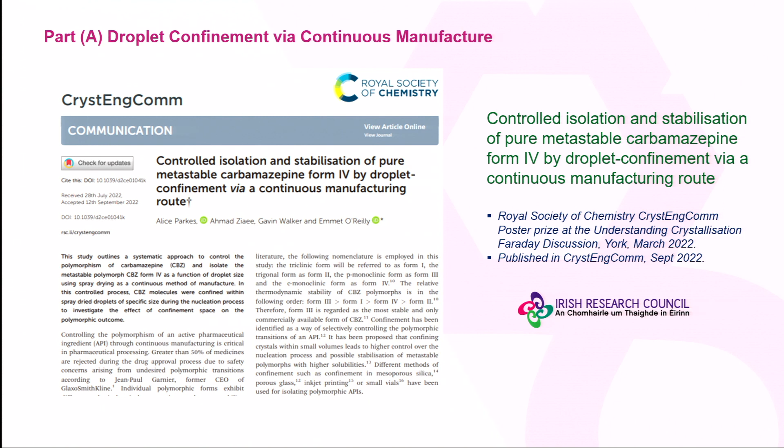So before I begin, let's just have a quick recap of what spray drying actually is. If you have taken a protein shake, okay, you've taken a spray dried product, same with baby formula. Essentially what we have is a liquid feedstock, which flows into an atomizer, and as part of that we flow in hot nitrogen or an atomizing gas. This converts your liquid into an actual solid. This process happens incredibly quickly, and we actually collect the product down below the cyclone.

What we do in my group is we change the ratio of the atomizing gas to feedstock, and as a result we can alter the droplet size. So we have two examples here: we have the larger droplet up the top and the smaller droplet down the bottom. So what this does is physically reduces the size that an API has to crystallize within, and as a result we see substantially different polymorphism.

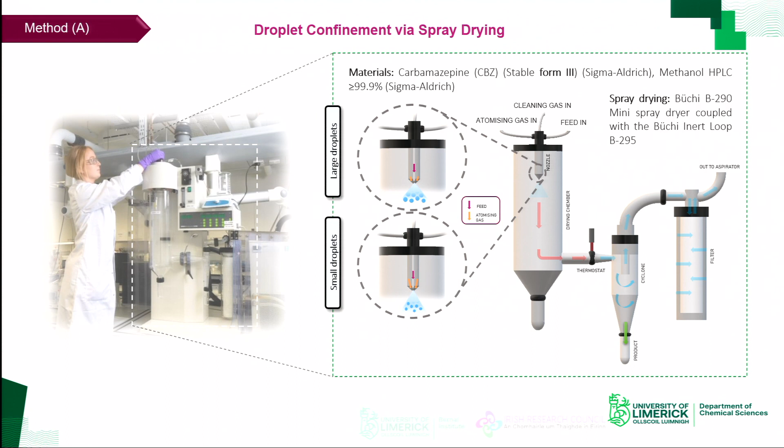So this particular study we performed using carbamazepine, which is an anticonvulsant medication, and it's typically administered in form 3. So form 3 is the actual commercial form, however form 4 is the metastable form, and this does show enhanced dissolution properties in the metastable form 4 relative to form 3.

So when we look at the table here, let me talk through some of the main results we've seen. If we run from sample S1 to S4, four individual samples, we can see here that when we change the actual atomizing gas flow rate, we get a subsequent change in terms of the droplet size and also the particle size. We can confirm this using particle size distribution, as you see on the right. With respect to the best graphical representation of what's happening here, that's down in the bottom left. As our droplet size changes, so does our final particle size, and we can see the corresponding SEM to look at the surface morphology.

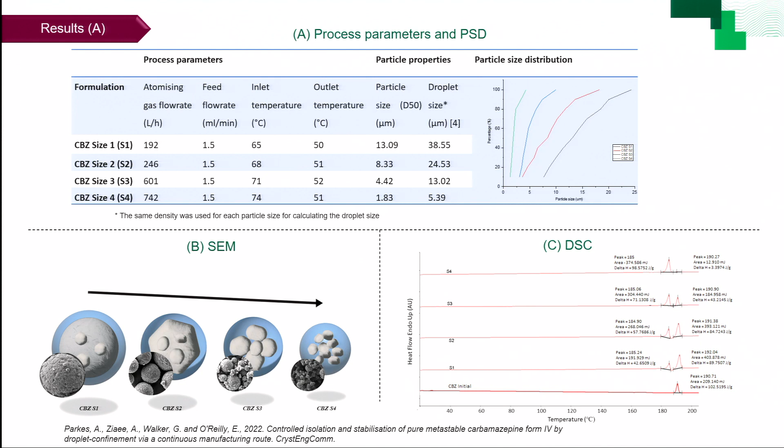Now, this ordinarily isn't that exciting. You would expect some change in terms of final property parameters with respect to altering spray drying conditions. But where it gets interesting is when we actually look at the DSC results. What we can see here is our melting peak for form 3, which is approximately 190 degrees C. With samples S1, S2, and S3, we see a combination of form 3 and form 4. Remember, form 4 is our metastable form - this is what we want to ideally produce.

However, we see a combination of both form 3 and form 4 for the S1, S2, and S3 samples. What we observe is that over a very short period of time, any of that form 4 that has formed transitions into form 3.

Now, what's really unique is if we look at the smallest droplet size, we can see that we actually have 100% form 4. We initially were quite excited by these results.

We put it on stability testing and took a look to see how the actual polymorphic form changes over time. We've confirmed that with PXRD, and we can see that it remains stable after 3 months. Well, it was 3 months when I compiled this slide originally - it's actually 6 months now.

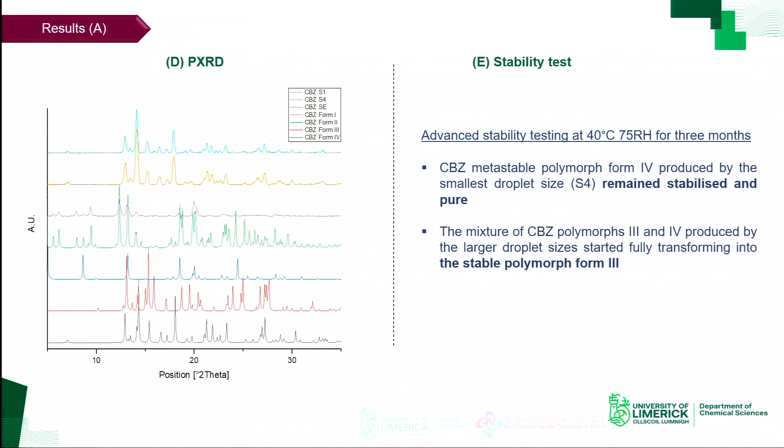So we've demonstrated a way to actually produce that metastable carbamazepine in form 4, which again has enhanced dissolution properties and potentially improved patient benefits as well.

So what does this mean? Well, there are a few benefits. From the scientific technical perspective, it allows us to, for the first time, actually produce carbamazepine in form 4. And it introduces the approach of targeting specific metastable APIs, giving us a certain degree of control over the nucleation direction in a continuous manufacturing framework.

But with respect to the community here today, the real potential of this work is in producing metastable crystal forms for current APIs that exist. We've demonstrated a method in which we can do this using size control, and we're rolling that out to different types of APIs at the moment.

Another potential benefit - we're probably all aware of this patent IP cliff. For example, if we can manufacture the same API but in a metastable form as opposed to its conventional form, that's potentially new IP as well. So it's a way of prolonging the IP for existing APIs.

So part B, leading on from this, we then chose to look at repeating the study, but rather than using a droplet size for the confinement, we actually went and used a porous structure - porous silica in this case.

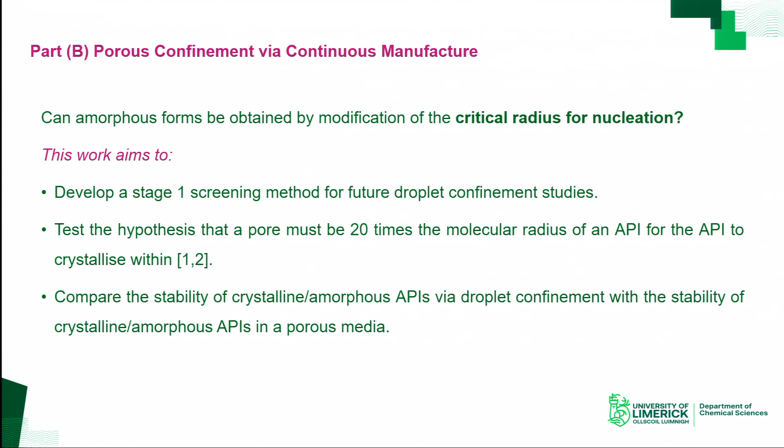Part of the reason behind doing this was, first of all, to develop a stage 1 screening method for future droplet confinement studies. When we are processing this using spray drying, we do have a certain amount of control over the actual droplet size. However, we can get more precise control if we use a porous substrate.

We also wanted to test the hypothesis that a pore size must be 20 times the molecular radius of an API for the API to actually crystallize within it.

To give you an overview of where this work stands - and this is very much ongoing - we have 4 different particles with different pore sizes. We have carbamazepine here on the left. These vary from 60 angstroms to about 500 angstroms in terms of pore size, and the actual carbamazepine size is about 8.8 angstroms, so it should definitely fit within each of these pore sizes.

We then made up a series of different loading ratios - the ratio of carbamazepine to the actual silica. And then we crystallized each of these products using 3 different techniques: slow evaporation, rotary evaporation, and also our continuous technique, spray drying.

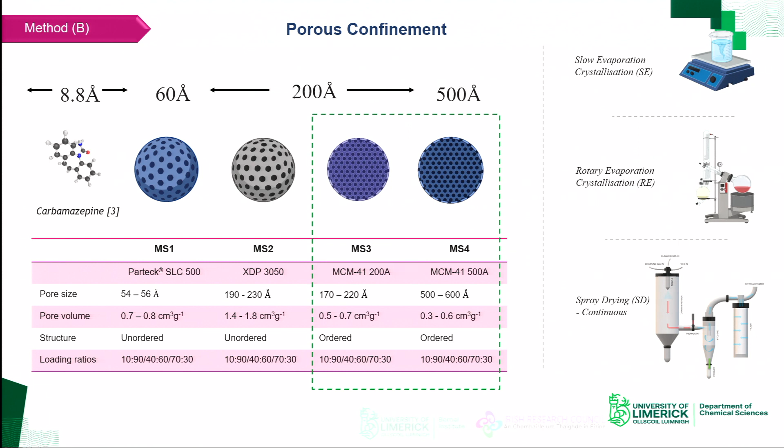Now, there's a lot of results here - I'm not going to show them all today. I'm really just going to focus on a synopsis of the results for the last 2 pore sizes that we looked at, namely the 200 angstrom and the 500.

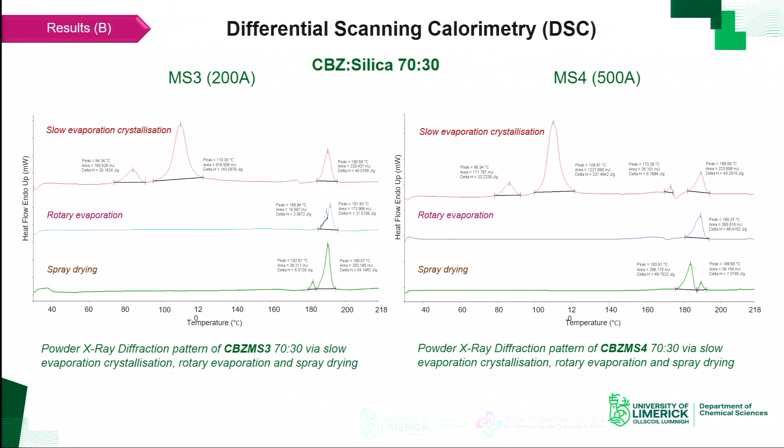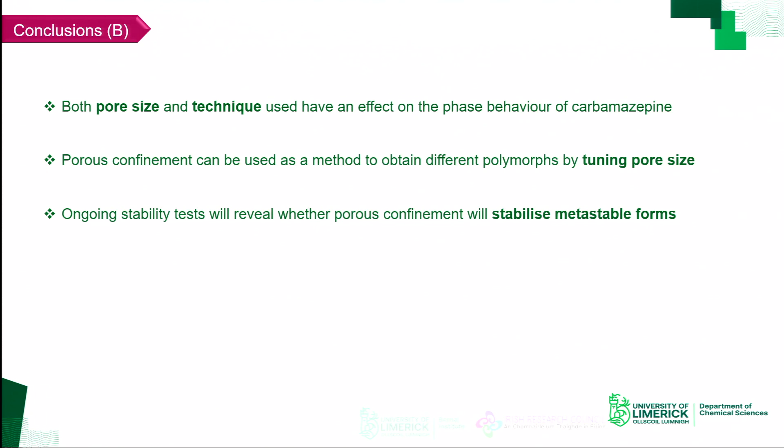So what does this mean? Well, in terms of pore size and technique, we can see that both have an effect on the actual phase behavior of carbamazepine. Porous confinement can be used as a method to obtain different types of polymorphs by tuning pore sizes. Ongoing stability tests will tell us over the next few months how stable or metastable these polymorphs actually are, and using these techniques we're now looking at a range of different APIs.

That concludes the small molecule part of this presentation. I'm going to move on now and speak a little bit about the large molecule side of things. Within large molecule, we see it's a rapidly expanding industry, and continuous manufacturing obviously is coming into that, and one of the main techniques for both drying and manufacturing biologics is spray drying.

Among the benefits, we see shorter production times, relatively larger shelf lives for the biological product relative to some freeze drying techniques, but more importantly, spray drying offers us the potential to engineer the particle. So why would you want to do this? Well, if we think about pulmonary delivery as a method of drug delivery, it's one of the more efficient methods compared to oral, transdermal, or intravenous.

So in order to manufacture a drug with the specific properties for pulmonary inhalation, such as a dry powder inhalation, there's a certain set of criteria required. For example, it needs to be below 4 microns in size, and it needs to have a specific surface morphology. Spray drying is a technique that can actually achieve that.

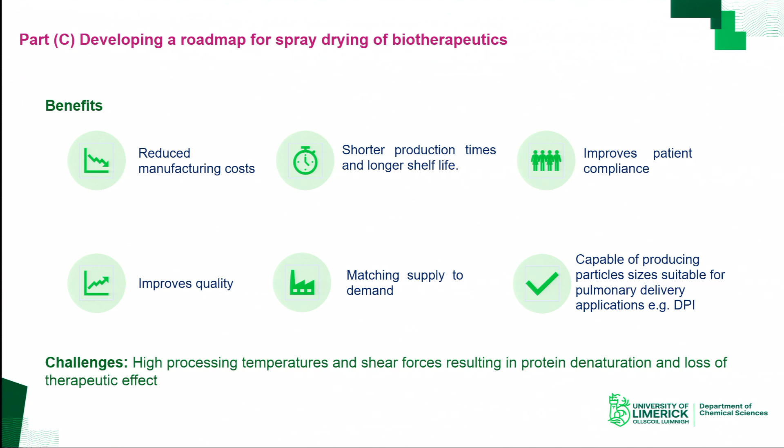Now, why isn't everybody actually spray drying biopharmaceuticals at the moment? Well, if we think about the process itself, it's a very energy intensive process. It involves high heat, and the biologic that you dry, or any material that you dry, is subject to a high degree of shear stress. As a result, we often get protein denaturation. So you could spray dry a biologic and have the desired final properties, however it's after losing any of its biological activity, so as a therapeutic it's effectively useless.

So what we do is look for strategies for addressing that. We initially set off in terms of our aims, and we've kind of expanded on this since. We set out to develop a roadmap for spray drying stable dry powder biotherapeutics with retained biological activity. Retaining the biological activity is key here, along with identification of critical processing parameters with respect to particle engineering for pulmonary delivery.

Ideally we want to be able to produce these particles with the right size for dry powder inhalation, but also have a very high level of activity retained. We initially chose lysozyme as a model biologic. There's a lot of runs with respect to spray drying to optimize this process, so we needed something relatively robust and relatively low cost, and we chose lysozyme in that case.

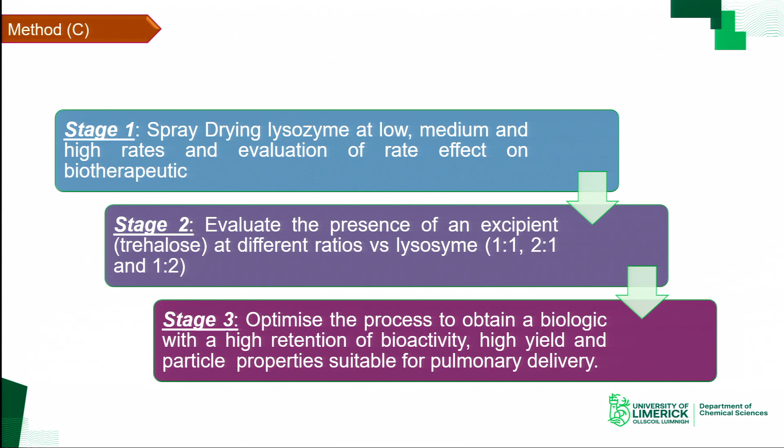Stage 1 involved spray drying lysozyme at low, medium, and high rates to evaluate the effect of both the temperature and the shear stress on the activity of the biologic. Stage 2 involved introducing an actual excipient, in this case trehalose at different ratios, to see if this actually protects the biologic during the drying process itself. Stage 3 then looked at optimizing the process to obtain a biologic with a high retention of bioactivity, high yield, and high particle properties suitable for pulmonary delivery.

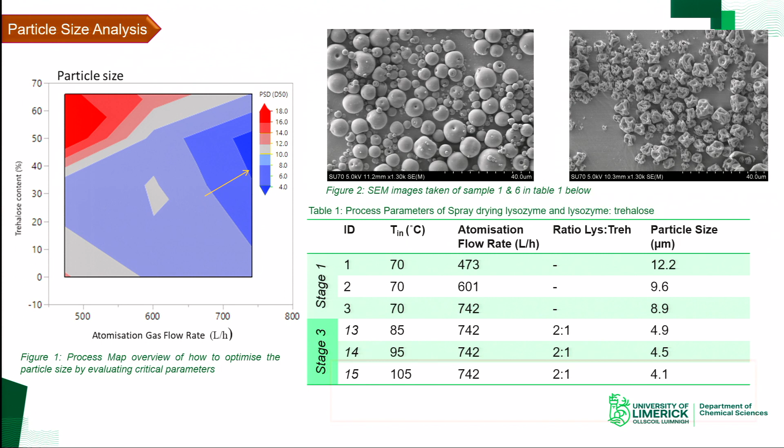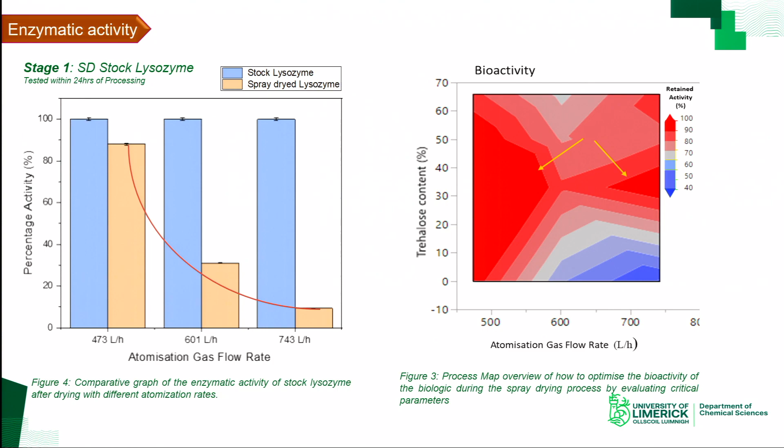However, if we plot the bioactivity versus trehalose content versus atomization flow rate, we can see there's potentially a sweet spot on the right-hand side. So if we process within these conditions, at 742 litres per hour with trehalose content of 40%, we can produce the biologic with the defined size for dry powder inhalation, and also something that retains the activity.

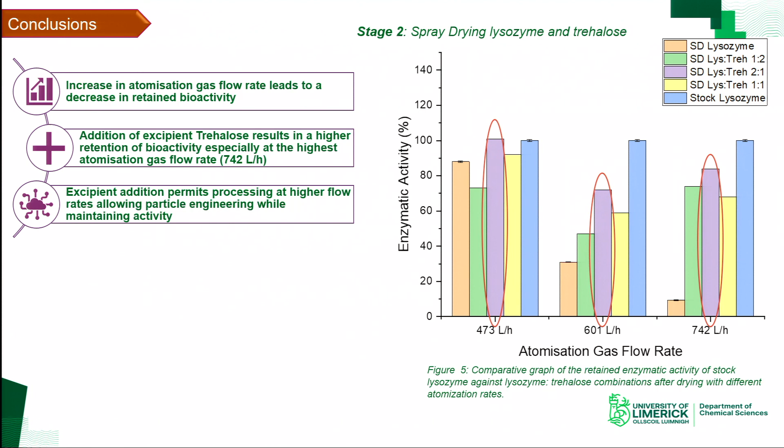So where does that leave us in terms of our conclusions? The addition of the excipient trehalose results in a higher retention of bioactivity, especially at the highest atomization gas flow rate. We've then gone on to further optimize this.

By processing at the conditions predicted by overlaying the process maps, we can achieve these particular parameters: particles with a high level of activity, greater than 90%, size of about 4.1 microns, a relatively respectable yield of 54%, and residual moisture content of 3.72.

So where we stand with this work is we are currently investigating a variety of different small molecule APIs, based on the process I showed you in part A and B of the presentation. We're also looking at investigating these APIs specifically to target stable, metastable forms.

On the large molecule API side, we're expanding away from lysozyme. We're now working with some large molecule proteins, and we're developing individual process maps for this.

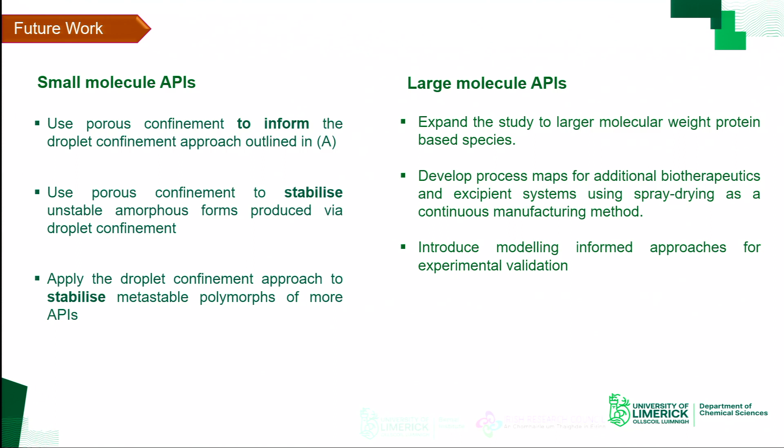So where this feeds into the community that's here today, we're very keen to work with you on this. For example, if you have a small molecule product that's a drug on the market at the moment, but you know there's a metastable form that potentially can benefit you in terms of future IP or improved therapeutic outcomes, by all means come speak to us. We can run your samples on the processes we've developed.

Same thing for large molecule. If that's a space you work in, we can actually go and apply our process maps to your excipient and large molecule protein concentration and identify what works best for that.

I suppose from listening to me here, you'd be forgiven for thinking I've done all this myself. I haven't. I'm very fortunate to have 3 excellent PhD students, namely Alice, Laura, and Emily. And I should also thank Dr. Ahmed Zai. A lot of this work is based on the work in his thesis, which he submitted back in 2020.

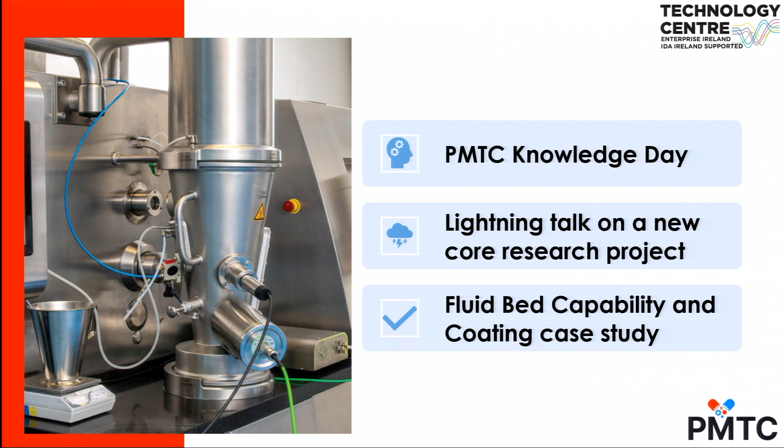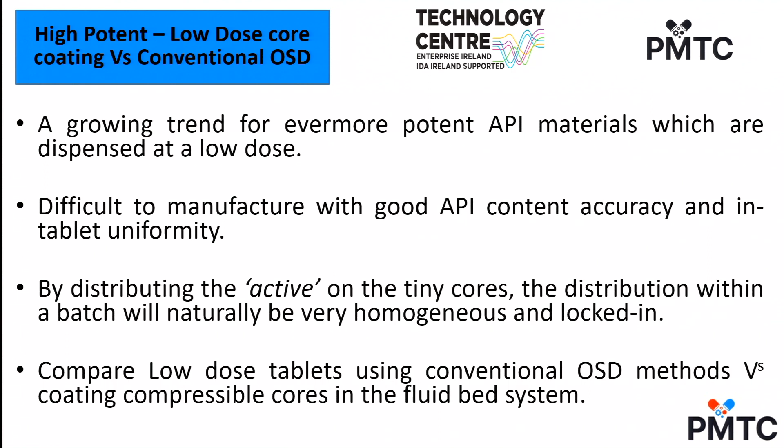That we're going to undertake on this new equipment. So, within the pharmaceutical industry, there's a growing trend for more and more potent API materials, and because of their potency, these are dispensed at a low dose. So using conventional and traditional OSD manufacturing methods, it's not easy to produce good API content uniformity in a tablet.

What we are planning on doing is to use a fluidized bed system to coat an API or an API surrogate material onto cores, and then use these in the remaining OSD manufacturing methods. By distributing the active material or the surrogate material on these tiny cores, you get essentially little granules with a little amount of the API on the surface. So when you combine all these together, you inherently get locked-in API distribution.

As long as your weight variability is low, you will get good tablet-to-tablet variability, and also good within-tablet homogeneity as well. So with this project, we're planning on looking at two streams, a conventional manufactured stream and a sprayed granule stream, and then producing tablets and looking at the homogeneity of API between the two.

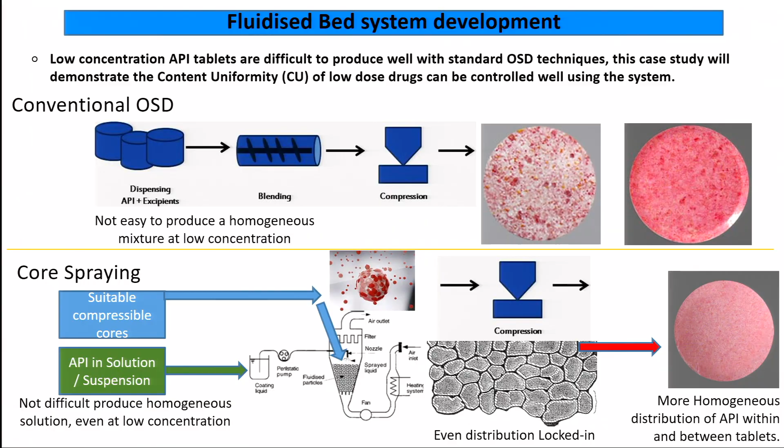Then when we compact them in the next compression stage, you get something like this. Each of your cores will three-dimensionally, plastically deform and intertwine, but the API remains very well distributed around each of the cores. So your tablet at the end should be far more homogeneously distributed within each tablet, and as long as you have a good weight distribution, you should have a good homogeneous API distribution between tablets also. So how will we plan on doing this?

We were very lucky to have won some funding from an EI Capital to be able to purchase this Glatt multi-lab system, which is capable of granulating and Wurster coating materials and also drying those materials within itself. So this is an advanced manufacturing platform.

Essentially all the process and sensors and PAT technologies are brought into SmartX, which is the Inopharma system, built on top of this Glatt unit to take care of all of the input streams and be able to build models to control the system. So we'll see a bit more here.

All the process and PAT data streams are assessed using the multivariate interpretation, and these are used to build models. For example, you can have your airstream temperature, your airstream rate, your product temperature, etc., all as process variables. You could set those, and you could stream all that data in real time.

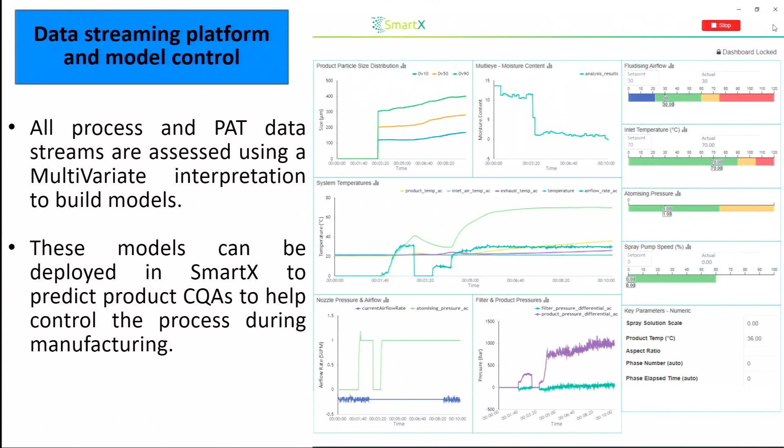In addition to that, we also have PAT technologies on the system which give us particle size analysis, in terms of our D50 and our D10 to D90, to be able to monitor that while we're actually spraying. We're also able to build models from our NIR input data, and these can be deployed in SmartX so that we can have real-time analysis and determine other properties, as we'll see next.

This graphic is work done by Sam, Marcus and Chris at Inopharma, showing the evolution of particle size, the yellow line on the bottom, within the powder bed. They use the fluidizing airflow rate to maintain fluidization, which was the feedback loop to actually produce these materials.

But on top of that, they were able to use the NIR data to model the actual moisture content and predict that, which is the orange line. At line, they were able to take samples and undertake loss on drying analysis, and you can see that it actually matches the NIR quite well.

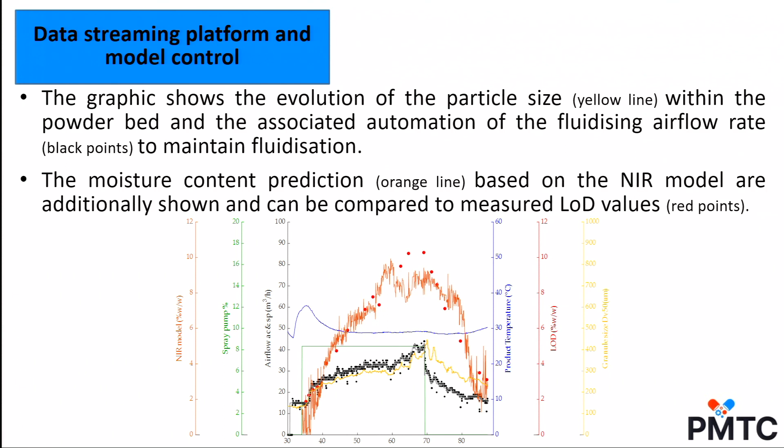This shows that the system is able to feedback control with inputting process data and also from PAT technologies. So the unit operation is capable.

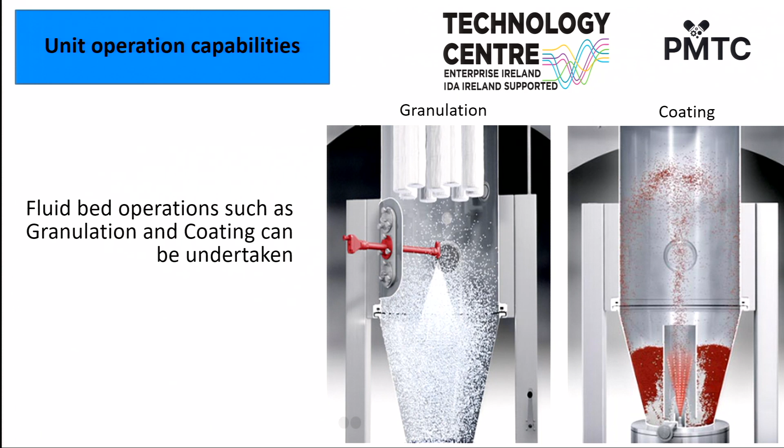It can do both top spray granulation, where you take a fine powder. If something has bad flow or you just want to granulate it, you add in the finer materials at top spray and produce larger granules which flow better. But also, what we're going to use is the bottom spray Wurster tube, where we can put in our granules and bottom spray and coat them in an even way.

Our plan is to use all the PAT technologies to get an end of spraying set point and automatically stop when we have the correct amount of API material or surrogate material on our coated material.

So we now have a unique resource to help develop or improve existing fluid bed processes. This work we're going to undertake should show the unit's capability and generate a case study which will demonstrate the feasibility and power of real-time data and data analytics in supporting development.

So we can fully monitor, model, and build control strategies for granulating and coating operations. If there's any interest to anybody, feel free to contact us at any time, and we'd be delighted to work with you to benefit your processes. Okay, thank you.

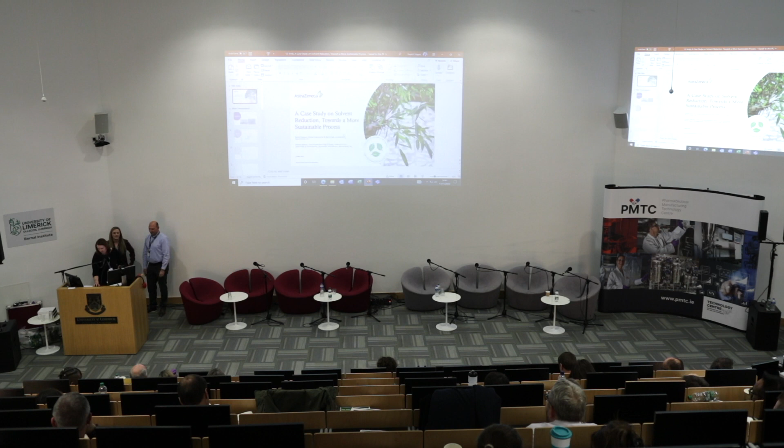Over to you. Thank you, Sarah, really pleased to be here. I'm very grateful for the opportunity to talk you through what started life as a simple project as part of our continuous improvement program for our cleaning process on the pilot plant, and through a disaster during that project transformed itself into quite an impressive sustainability project.

I'll give you an overview of the pilot plant facilities at Macclesfield and show you our cleaning process and how we came about to identify this particular process. Then Rachel will take you through how we embedded the process onto the pilot plant and talk you through the outcomes.

Drug substance manufacture is based at Macclesfield, AstraZeneca's Macclesfield site. It's part of the clinical manufacturing supply chain, and we manufacture development compounds for the clinical manufacturing program. We've got a multi-product facility manufacturing a range of API intermediates for the clinical trials. We have 6 production trains across a number of plants, ranging from 250 litres to 6,300 litres. We have a hydrogenator and a dedicated Pures facility.

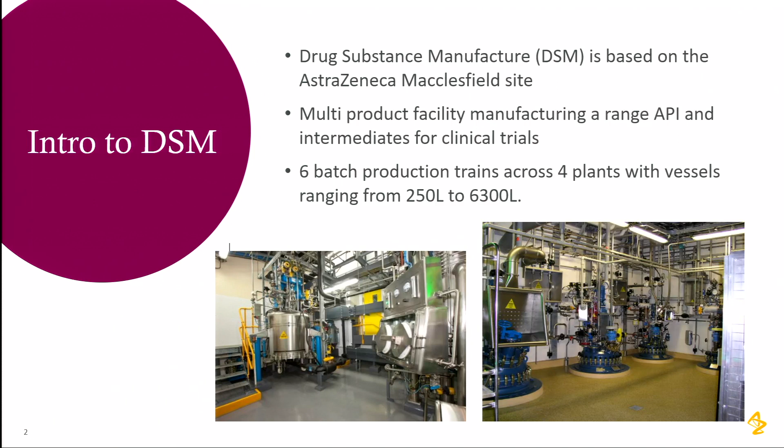Of course it's an old aging plant, so some of our plants are greater than 35 years old, and that means it's a really intensive process to clean the plant. Cleaning from small molecule API is difficult, especially in the development field, because we don't necessarily have an understanding of the mass balance and the limited information available to us to target specific cleaning activities.

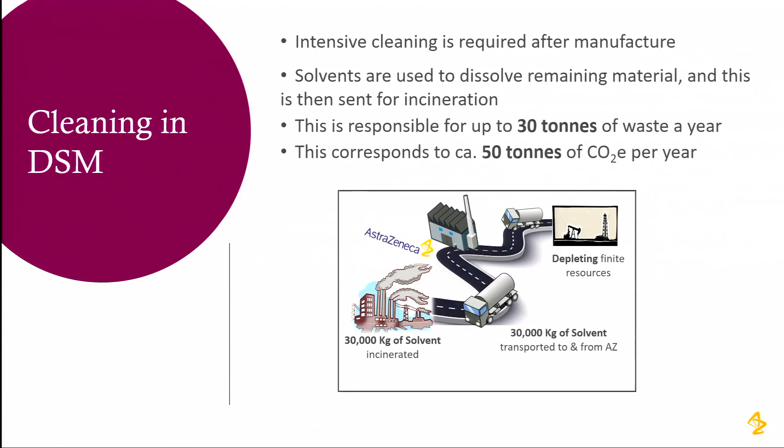So we use solvents predominantly to clean our plant. We do use detergents, but as a last resort once the solvent process has failed to achieve visual cleanliness. We use solvents to dissolve the remaining materials, and we do not have a treatment facility on site, so all our effluent, whether that's a drummed waste stream or bulk effluent, is taken off site for incineration. Although we're a relatively small facility, this is responsible for up to 30 tonnes of waste per year, which corresponds to approximately 50 tonnes of carbon dioxide per year.

So, small molecule API plants are really complex, and we have to clean them in a modular process.

At Macclesfield, we rely on condenser flushing capability, where we can pump the cleaning solvent to the top of the condenser head and flood the condensers and the reflux return vapor uplift, then reflux the cleaning solvent in the vessels.

All our filter dryers and pressure filters are fitted with spray heads, but they're not impingement heads, they're just wetting heads. Only one of the equipment trains is fitted with spray heads within the reactors themselves. The rest rely on condenser flushing and refluxing, so it's quite resource intensive to get through to the acceptable carryover.

So we apply a modular process. The first thing we do is get rid of the gross contamination, and that's always the slurry transfer line from your crystallizer through to your pressure filter, the pressure filter heel, and then the filtrates line coming back out to the receiver.

So the pressure filter heel, for those not familiar with pressure filter dryers: they have a Hastelloy stainless steel cloth, usually 20 micron, and the solid is captured on that. We have an agitator in the pressure filter to make sure we have a homogeneous mixture.

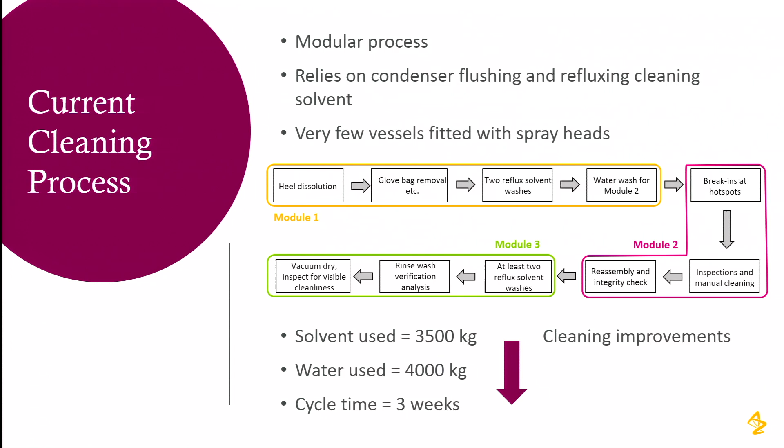Once we've demonstrated that we've met the acceptable carryover, we vacuum dry the equipment train and visibly inspect for cleanliness. This is where our continuous improvement strategy came in, because on average we use 3,500 kilos of solvent, 4,000 kilos of water, and the average cycle time for that whole process is 3 weeks.

We've got examples where that's taken an awful lot longer, so we wanted to understand how we could reduce those.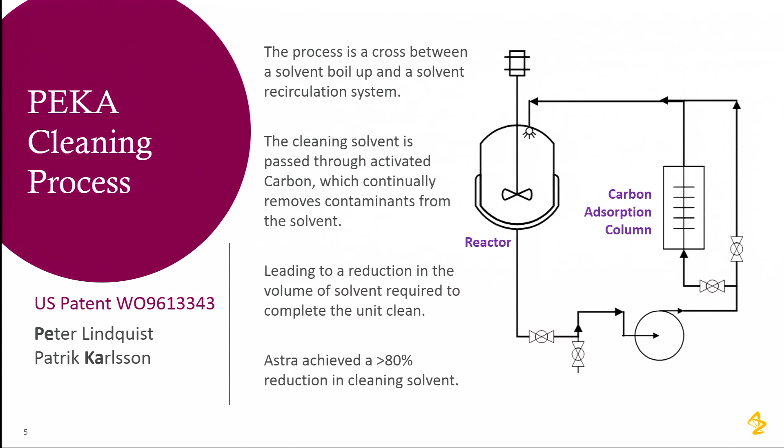I was aware of technology developed at the Astra API sites over in Sweden, called the PEKA cleaning process. They used activated carbon and recirculated the rinse solvent wash through the carbon, reducing and removing the solute, which led to a significant reduction in the volume of solvent required to clean the plant, so much so that they achieved a greater than 80% reduction in the solvent required.

Astra liked it that much that they named it after the two engineers that developed it, and that's where PEKA comes from: Peter Lindquist and Patrik Karlsson.

We have historically used the PEKA cleaning process at Macclesfield. The technology was transferred from Astra through to our parent, our sister sites, when we merged and formed AstraZeneca. And this is a cleaning rig that we inherited from one of the sister sites and used at Macclesfield.

It's very difficult to scale on that photograph, but the handle on that cage sat this high with me. So using it at Macclesfield, it was a lengthy process, and we just historically didn't see the same level in reduction of the cleaning solvent as the Astra site had had.

And the skid occupied a large footprint and required a separate GAF filter to house the activated carbon. In our case, we used pelletized carbon norit.

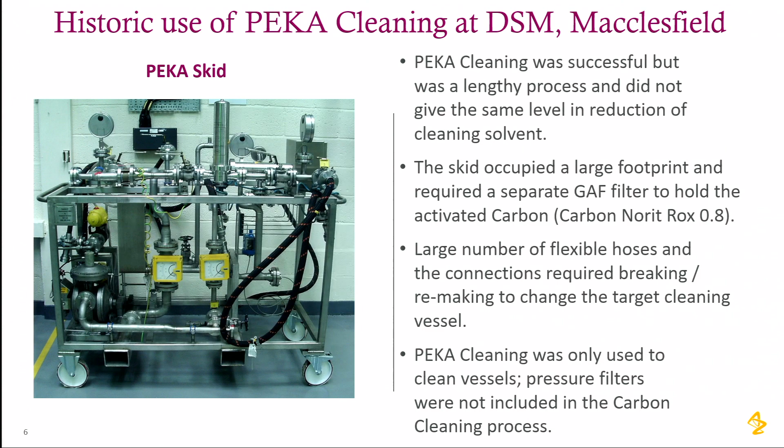And then, with it being, we're embedding the process into aging plant, we needed a large number of flexible hoses to make the connections, and then make and break the connections to change the specific target vessel as we stepped along the process. And perhaps the main reason why we didn't see the same level in reduction as the Swedish plants did

was because when we first trialled it, the cleaning process was only used to clean the reaction vessels. It wasn't used to clean the pressure filter, which we know is the area of the largest hold-up within the equipment train.

So we embarked on a number of trials. I'll get to the photo in a minute. So, being a development facility, although we're continually manufacturing API, that is not necessarily one campaign following another in the same plant, and we quite often have a little bit of downtime in a plant, and we can use that time to trial cleaning initiatives.

We targeted our smallest plant, the plant vessels fitted with the spray heads, and also with the condenser flushing capability. And this is also one of our newest plants, so we have routing stations so we don't have to make and break so many connections every time.

We used water, and we determined the minimum recirculation volume for each vessel and each combination of condenser flushing and then recirculating via the vessel spray heads. And we started in the smallest vessel first and then stepped the cycle up right the way through to the largest receiver.

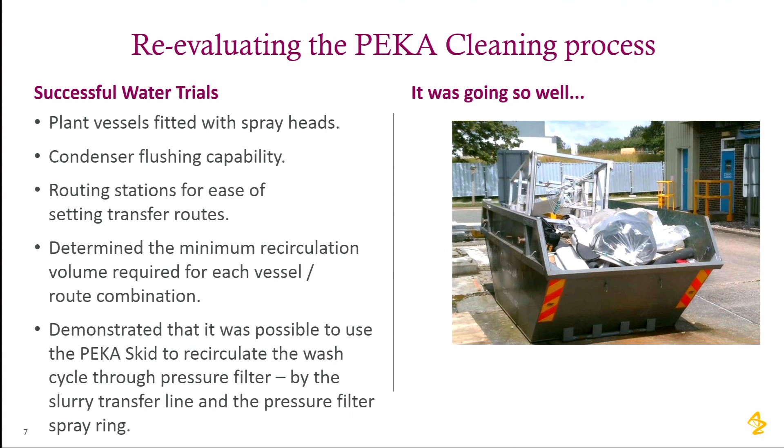So that's the frame of our cleaning skid, and as I mentioned before, it was at least 25 years old when we brought this back online, and engineering, certainly welding standards, are not what they are now. And unfortunately, the welds had given way, and we were unable to take that forward.

And there's our disaster. We prove concept, and then we lose the equipment required to run it. So Rachel and I, we went into a period of reflection, and we understood that we'd achieved something with demonstrating that we could get through to the filter.

But we also, once we analysed and took a step back, we realised that although we haven't got the skid, the pilot plant had all the components of the skid sat there just in its own right. We have pumps, we have an array of filters, in our case we have the inline UV.

So we started to build a picture of how we could use the existing plant and apply the philosophy of PEKA cleaning using the existing equipment.

And then when we really started to think about it, we thought that we could use a different type of carbon. Instead of handling active loose carbon, we could go to a supported medium. And in our case, we used a CUNO filter, and 3M provided us with supported carbon filters for use with the CUNO filters. That significantly reduced the operational hazards associated with handling loose carbon.

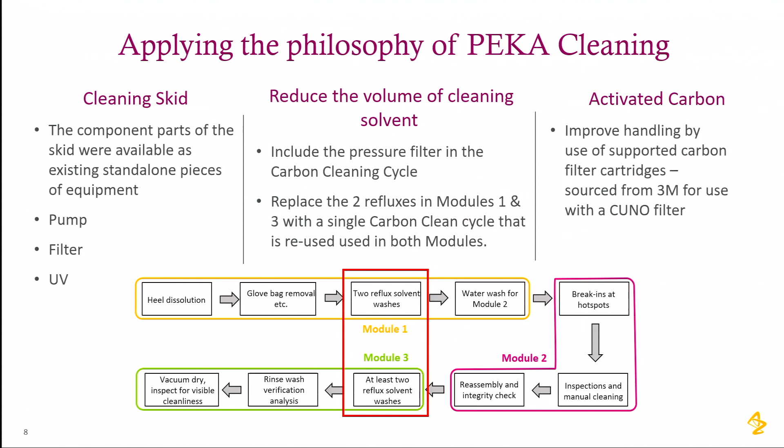So you've got a 50% reduction in solvent for your module 1, but because that solvent has been cleaned by the carbon and it meets the acceptable carryover quantity, we reuse that solvent from module 1 in module 3, and again start with the smallest vessel in the equipment train, stepping ourselves through in the same process.

The carbon is always working, removing the solute, and at the end the target is that the rinse wash meets the acceptable carryover quantity. In doing that, you've saved yourself another 2 full volume solvent refluxes. So we're targeting a 75% reduction in the volume of solvent required to clean the process.

So that's the theory. So now I'll hand over to Rachel to show you how that happened, or what happened next. Yeah, great, thanks Andy.

So yeah, as Andy explained, we had an unfortunate demise of our PEKA cleaning skid, but we still had the targets to get to that 50% solvent reduction within our area as a business. So we pulled together existing equipment we already had on plant.

This photo here shows you the setup of the new redesigned skid. From right to left, I'll go through: we have the UV vis, which you can see on the right-hand side, an ATEX UV vis instrument, spool mounted onto the outlet of the CUNO filter.

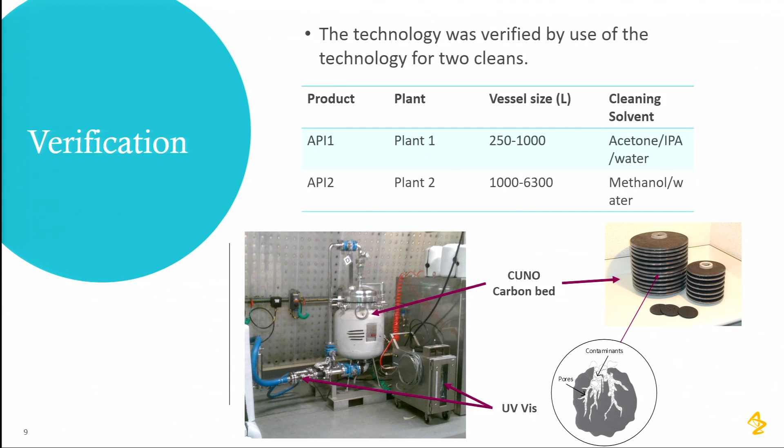So this setup was verified on 2 cleans. We started off using this on our smallest plant on product API 1, and we used an acetone IPA water mixture. Then we trialled this again on a second product, API 2, on our largest plant with a methanol water mixture. That's how we repeated the solvent savings on another plant.

I was going to say next slide, please, but I'm in control here.

First, to charge solvent to the vessel to clean it, we'd have to charge a solvent volume that would give us some buffer within the vessel, but also take into account the volume of the filters, the GAF filter, and all the associated pipe work, because we still needed to be able to take a sample of this solvent whilst we were cleaning.

So we'd charge the vessel, then pump it and recirculate it through the 2-pot GAF, which was already in place on the plant, so we utilised that, pass it through the CUNO filter, and follow the flow around. We'd hit the spray ball first to do the vessel coverage, then change the routing and hit the condenser to target condenser cleaning.

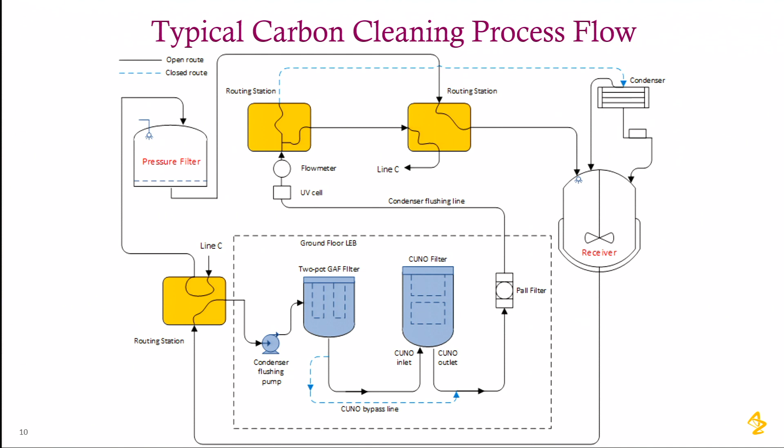This diagram shows a representation of us cleaning the pressure filter, which on our smallest plant we were able to do, but it was tricky in practice on our largest plant, where the pump wasn't capable of maintaining that pressure on the recirc loop. So what we had to do there was fill the pressure filter with solvent from the vessel, and when we had that volume in the pressure filter, do a nitrogen blow transfer back, and then we could recirculate that through the skid. So that was some learnings for us there.

There's quite a lot of pre-work that goes into running the carbon skid, mainly around selecting the appropriate carbon grade. We worked really closely with 3M to look at the different carbons, because they all have different properties based on their activation types.

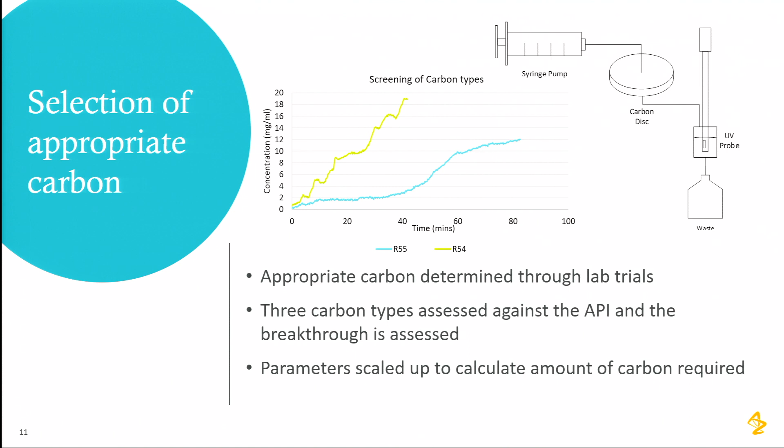They were able to give us some carbon discs which we could put in the lab, and we had a setup of a syringe pump with a carbon disc filter and a UV probe in line, so we could assess how well the API was absorbed from the syringe pump, which was a waste stream that we took out. It had absorbed through the carbon disc, and this graph shows R55, R54 carbon grades, and the UV probe was used to look at when we achieved breakthrough, so we'd know when to change that carbon over.

Secondly, once we picked a grade of carbon, there were then flow tests. By optimizing the flow and the residence time through the filter, it also affected the adsorption capability, so that was another thing we had to look at.

This slide gives you an idea of what the operators can see on plant. It's the operators running this UV as part of the batch sheet instructions. Talking about the skills gap earlier, in terms of training them how to use this PAT was probably my biggest challenge on this.

On the left-hand side, you can see this was our first clean with API 1 on our smallest plant. We have an acetone peak which unfortunately does kind of blind the response of the API, but you can just see it sits on the shoulder of the peak, that API reducing as we were recirculating through the bed.

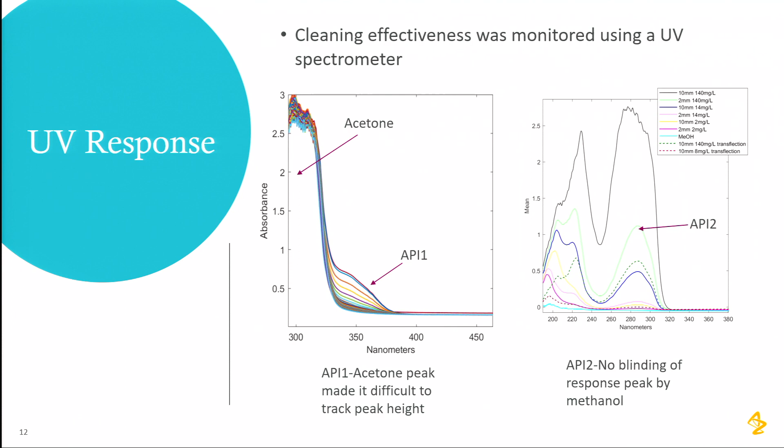To the right-hand side is our API 2 on our largest plant. This was the methanol water mixture, so there's no blinding of the data, so you can see a really clear reduction in the API in the waste stream down to 2 mg per litre. Unfortunately, that was the lowest detectable level of our UV instrument.

We didn't use it for inline decision making, but the benefit to the operators was that we could see at what point we were becoming close to clean. So it reduced the sample burden massively, which helped in that instance.

I'll just quickly talk to this. Some offline analysis our chemist did in the lab was looking at time versus concentration. This big peak on the left shows the reduction in concentration over time, but when we correlated that to a batch sheet, we could see that's when we were recirculating through our spray ball, and it took approximately 36 minutes to get down to those undetectable levels of our UV instrument. Then again, when we did the condenser flushing, you can see two little peaks there.

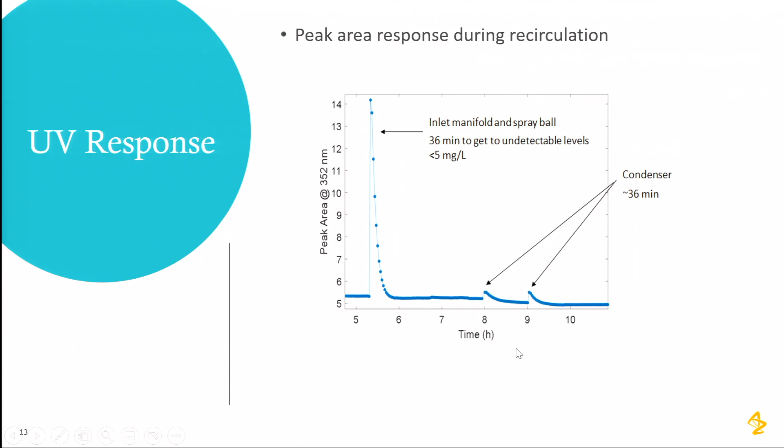So this is the impact slide. Looking at the percentages saved with our smallest facility and that product API 1, that 42% solvent figure correlated to 1,000 kilos of solvent saved in that clean. And on our largest facilities, where we saw the greatest impact at 70%, we saved 9,600 kilos of solvent in that clean using this technology.

We also did a cost analysis on this, because you've got the carbon filter costs, which aren't cheap, versus the solvent costs. And the larger the plant, the more gross contamination you've got, the more cartridges you're likely to use. So in terms of a cost analysis, there wasn't a cost saving that was a driver to do this - it was more around the sustainability metrics.

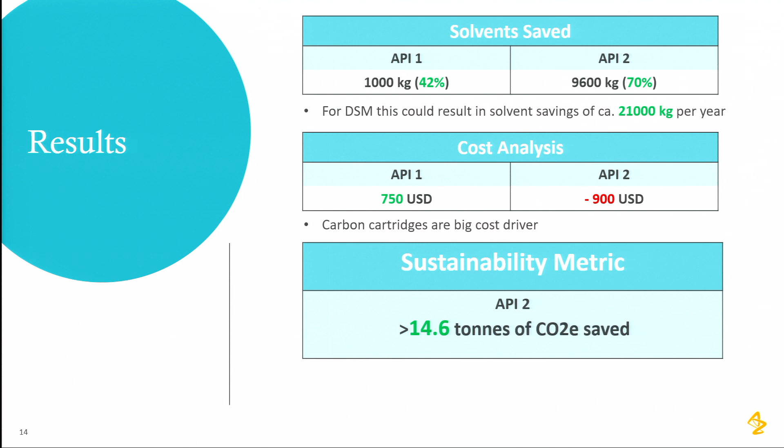We had a sustainability assessment performed, and it showed us that on our largest clean, we saved 14.6 tons of carbon using this system. It sounds silly, using carbon to save carbon - that's what triggered the sustainability assessment. And if you extrapolate that across DSM for the year, it's a potential saving of 32 tons a year.

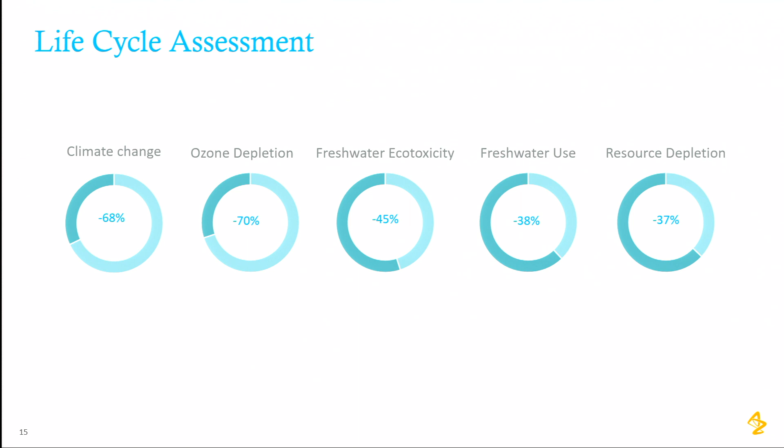A third party did this life cycle assessment for us, and the light blue colouring on these pillars shows us the savings with this new cleaning method versus our old cleaning methods. So it helps us see our environmental impact.

So the learning - I was very much a part of this project from the start through to the demise of the Pika skid, and there were various iterations because we were learning as we were trying to set this up. These learnings we've now applied to the design of a new skid, which is being funded by an internal group at AstraZeneca called the National Resources Reduction Group, who have dedicated funding to fund these kinds of sustainability projects.

We looked at whether a single pass through the filter versus recirculation around the filter would help adsorption, so the new skid allows you to do both. We can flexibly relocate the UV depending on the process and what we want to look for. We've added a temperature probe to monitor the temperature effects on the UV.

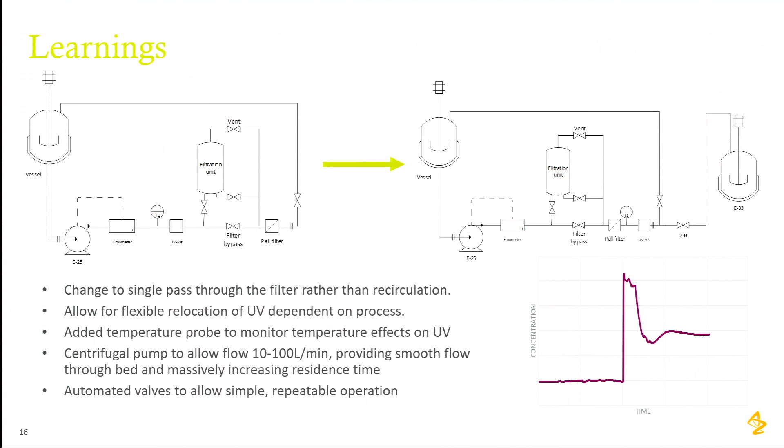During the commissioning, we had quite a lot of issues with pulsating pumps - we had air-driven diaphragm pumps. We've now looked to use centrifugal pumps and also allow variable speed flow, which enables us to hit the flow rates on the spray heads as well as reduce that down when putting it through the carbon to hit the residence time for adsorption. There's some level of automation included as well.

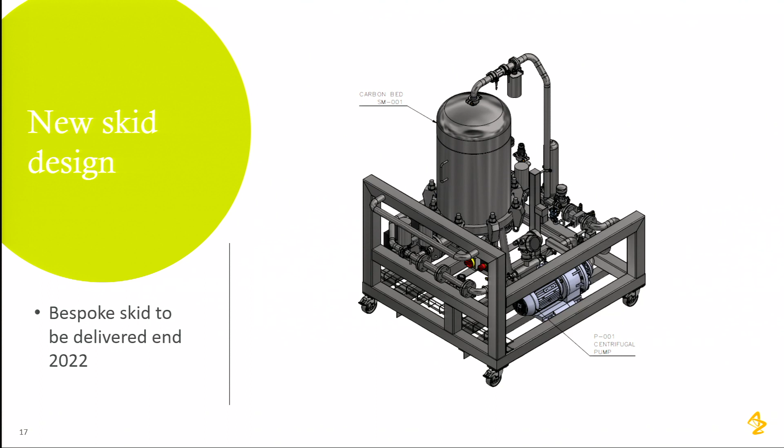So this is the new skid design, to be delivered end of 2022. When this is delivered, there's a bit of rollout to do in terms of getting this as BAU on the pilot plants. As Andy mentioned earlier, only one of our facilities has spray heads, so we'll have to install spray heads across all facilities to get the maximum benefit out of this. And where we have simultaneous cleans, there's also an argument that we probably need a second skid in the near future.

I used to work alongside Andy for 4 years in the pilot plants. I've recently moved on to the design of the new API facility going into Dublin, doing the process design on that. So we're looking at taking the learnings from all this work done on the pilot plants and applying it to our new facility, basically aiming to reduce solvent usage at point of use.

We've allowed space for 2 of these units because we'll have 2 batch trains within our facility. We've also been able to design the plant with cleaning in mind, which came up earlier as well - we've got a gravity flow through the facility over 4 floors, following the process vertically. We've looked at layouts of the equipment to reduce the cleaning, so where we've got crystallizers, they'll be directly above the filter dryers, for instance, giving a direct drop.

There's fewer hard to clean areas. We have multiple spray heads per vessel, hopefully, and a lot of recirculating CIP lines to really hit every point of use in that process line.

We've also got, as Andy mentioned earlier, the flexible routing stations, so that allows us to either use this carbon technology, or as future technology moves in - membranes, for instance - we'll be able to swap this out as our knowledge of membranes and other types of technology develops in the future.

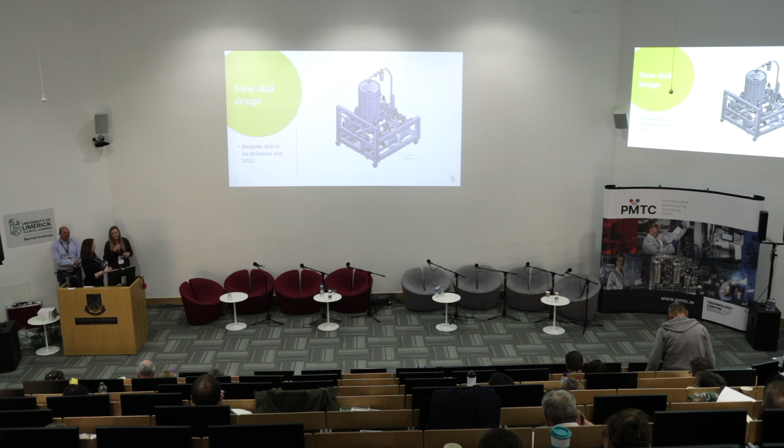As I mentioned at the start of this session, we're looking towards sustainability, and we knew that the Macclesfield site were doing this work. Interestingly, Andy, you didn't bring it up in this presentation, but when we spoke before, you mentioned that looking at that project through traditional return on investment, it didn't have legs because it was taking more time. But when you look at it through a sustainability lens and carbon footprint, it's a game changer. I think it's in that context that we wanted this insightful case study to be shared. So thank you so much, and it's a great segue into this panel discussion.

I'm delighted to welcome Padraig Summers, who's currently our chairperson, but actually one of the founding fathers of PMTC. Padraig's had a long career in the pharma industry, both at drug substance and drug product, and been a site director, so understands very well what the challenges are, and the ever increasing challenges. Also coming back is Dr. John Cosgrove. And I'm delighted as well to welcome Michael Gillen. Michael had planes, trains and automobiles involved today to get him here from a meeting in Europe. Michael is a senior executive with Biopharmachem Ireland with particular expertise in environment, health and safety, and is also a conduit for the sector between here and Europe to help us understand what new regulations are coming down the tracks.

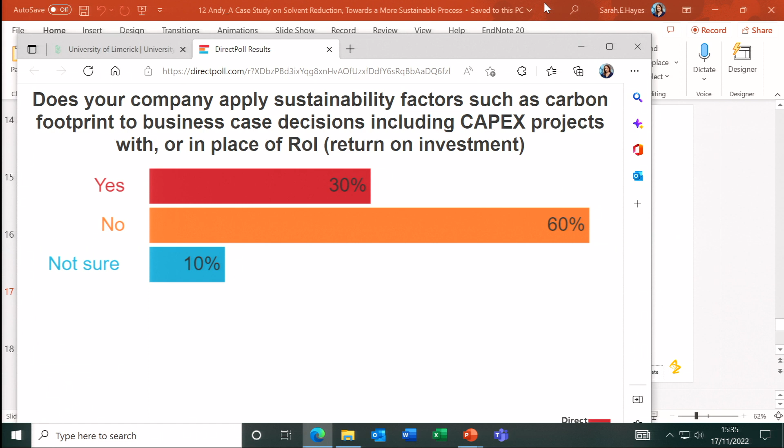Good, let's move it on a little bit. The graph is interesting in terms of the percent of yes, which is at 30% of companies. So I'm guessing - and I'm more than guessing, I'm quite sure - that AstraZeneca is within that 30%. So maybe moving on to the topic of designing plants for the future, and the considerations and implications of taking sustainability into account when making decisions to invest, and the actual technology. Rachel, maybe you have some thoughts based on your involvement in the new project and lessons from the old. I know you touched on it earlier, but maybe give it a bit more thought.

Yeah sure. So as you're all probably aware, AstraZeneca has the net zero carbon ambition for 2030, so we're seeing that within the design of the new build. We have facilities and fleet kind of targets, and we're designing the new facility to be up to LEED Gold certification. Part of that, we've got solar farms on the roof of the production building, green gas supplies to the site, and we're looking at sustainable things in terms of the facility, which I'm not directly involved in so I can't talk too much to it.

But in terms of process sustainability, because of the nature of the facility - it's a multi-product plant - we've looked at solvent recovery and heat recovery. But for some heat recovery instances, you need a unit running 24/7 to really get the benefit out of it, so the capital investment doesn't go through because it's hard to identify a unit where you can generate that heat recovery. And in terms of solvent recovery, there's a wider issue - you can't use solvent from product A on product B, for instance. So if we take that solvent recovery offline, we've probably finished the campaign of that product before we've even recovered it.